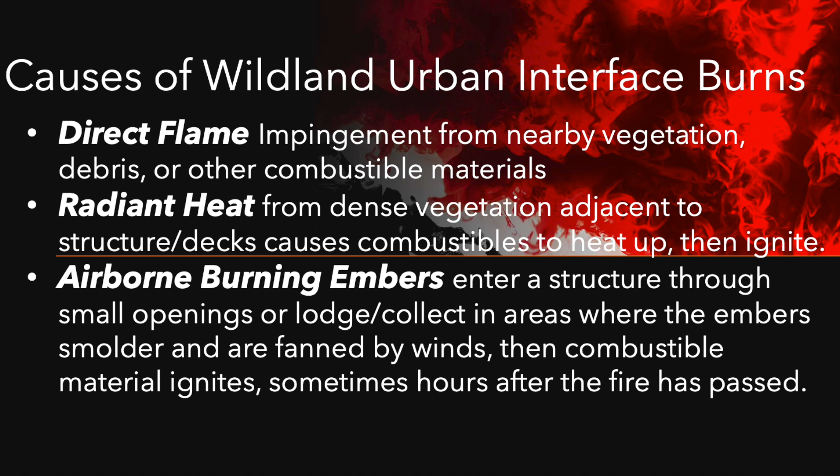Causes of wildland-urban interface burns: direct flame impingement, radiant heat, and airborne burning embers has caused some dynamics to wildland firefighting that we didn't experience before, where it's not just vegetation that's burning, but buildings, hazmat, sheds that keep hazmat. You see those types of structures burn for a long time. They can smolder for weeks. And you see embers flying from those to other areas of the county, and it's added a complexity to these fires.

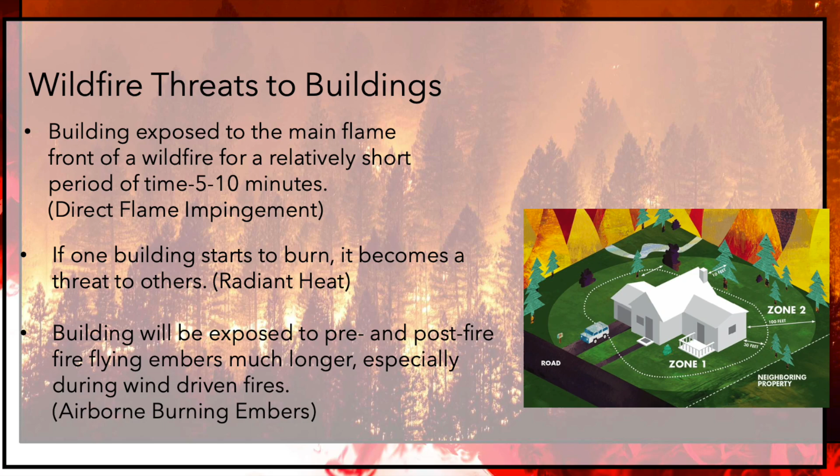So the goal of Wildland-Urban Interface code standards and vegetation management and clearance is to obviously harden homes and create a defensible space around these homes, kind of creating islands throughout your community where the fire can't pass through there and spread easily from vegetation to structures and vice versa, structures to vegetation.

A lot of fire resources are dedicated towards structure protection. When there is a house there, you can dedicate an engine company and a water tender just to a house, as opposed to a more traditional wildfire where you send resources and you dedicate them towards the flanks of the fire and controlling the flanks while you catch up to the head. When you have structures threatened, you usually dedicate resources towards that, and if they're dedicated towards structure protection, they're not able to chase the fire down and put it out.

Building code standards, Chapter 7A. This material is a little bit dry. I am going to go through it, but the construction materials that are allowed in the WUI are regulated by California Title 24, Chapter 7A, also known as the California Building Code. And then vegetation management, the other aspect of it, is California Public Resources Code 4291.

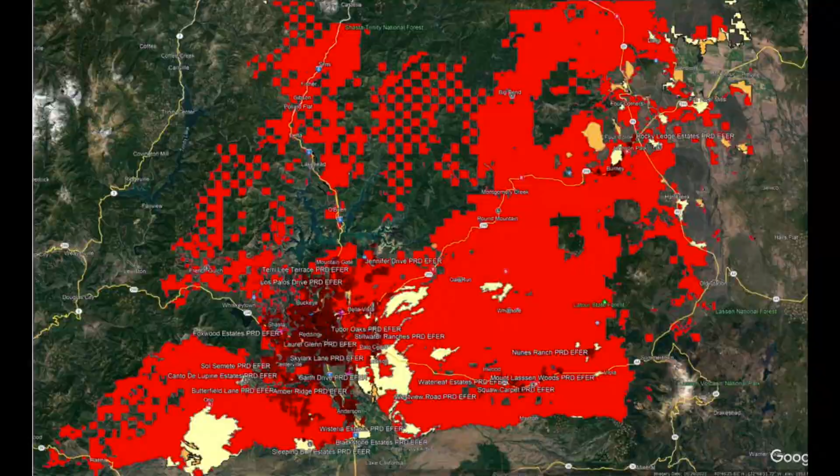So here's an overview of Shasta County. This solid red indicates very high fire severity zones throughout the county. The white is high fire severity zones, and then the non-colored is non-rated. Don't confuse all of these fire hydrants in Redding as part of the very high fire severity zone. That's just a whole bunch of fire hydrants jammed together in the city.

So we'll get into the different aspects of what types of building materials and how to recognize them as compliant materials for installing in the Wildland-Urban Interface. There's exterior sidings, and there's a section in the code that talks about exterior wall coverings and what to look for in a compliant material. Decking surfaces is a large one. I will be talking about that. I won't be talking about floor projections, and I'll be touching on windows briefly.

All right, so we'll just dive right into Chapter 7A, and I'll read from it. It can be a little bit tedious, I guess, but I feel that it's important to go through it. This chapter applies to building materials, systems, and/or assemblies used in the exterior design and construction of new buildings located within the Wildland-Urban Interface. The purpose of this chapter is to establish minimum standards for the protection of life and property by increasing the ability of a building located in any fire hazard zone within the state responsibility area or any Wildland-Urban Interface fire area to resist the intrusion of flame or burning embers projected by a vegetation fire and contributes to the systematic reduction in conflagration losses.

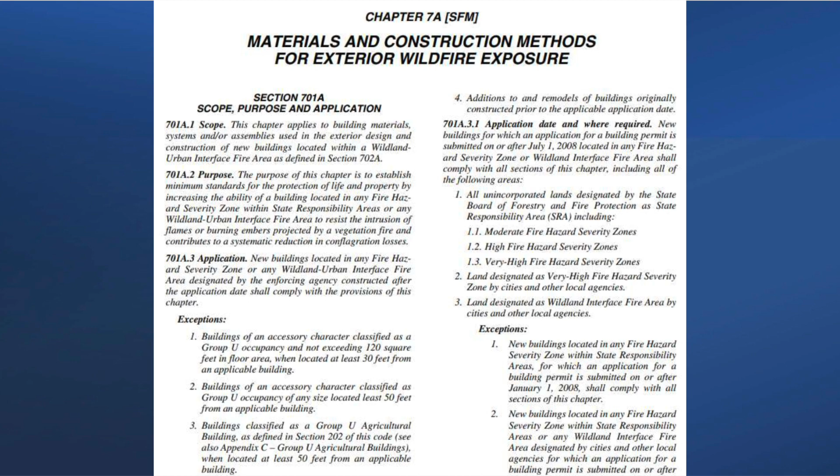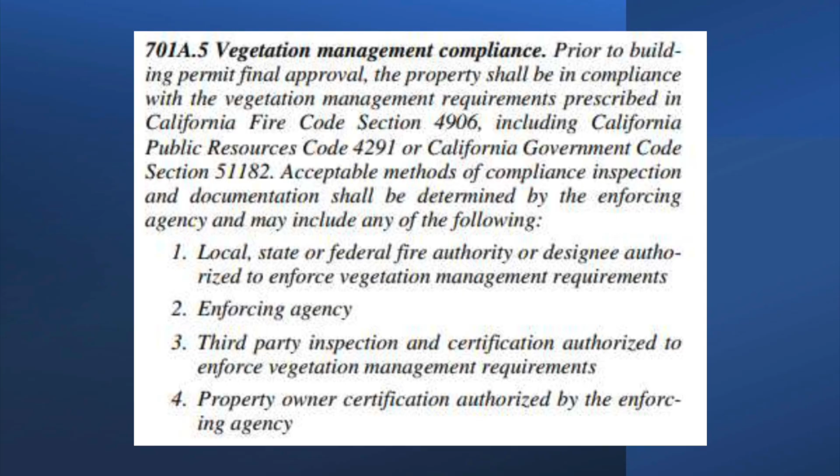There are some exceptions for smaller buildings, so sheds that are located remotely from other buildings and under a certain square footage. Vegetation management compliance. Prior to the building permit final approval, the property shall be in compliance with vegetation management requirements prescribed in California Fire Code 4906, including California PRC 4291.

So the way that the division of work has worked out in Shasta County anyway is that the building department enforces the materials for the building, ensuring that they're in compliance with WUI standards. Then my office inspects the vegetation management as a part of that construction inspection process. So the fire inspector will go out and look at the fire sprinklers and any other kind of fire protection systems that were built into the building. Then the building inspector looks at everything the building inspector looks at.

And then my office also looks at the vegetation clearances while the building is under construction and prior to certificate of occupancy. After the certificate of occupancy is issued, then the building department's jurisdiction basically ends. It becomes private property at that point and no longer subject to inspections, except the Public Resources Code 4291 allows for periodic inspections after the building and the property is finalized to ensure that the vegetation clearance is maintained over the life of that property. And that's what other departments do.

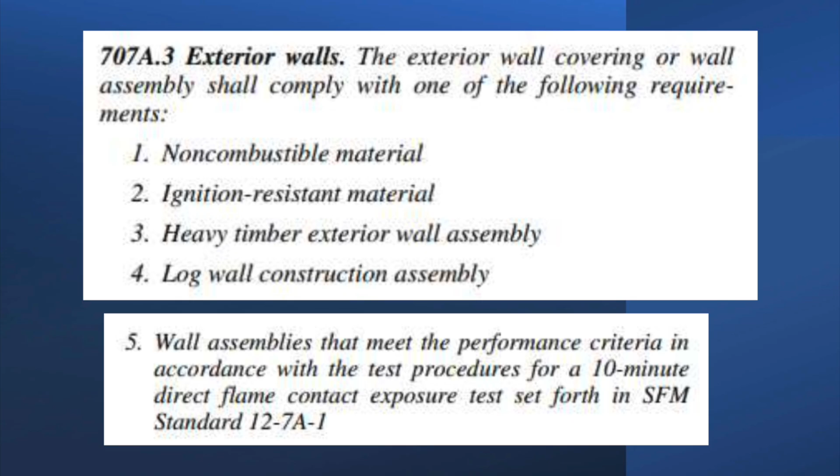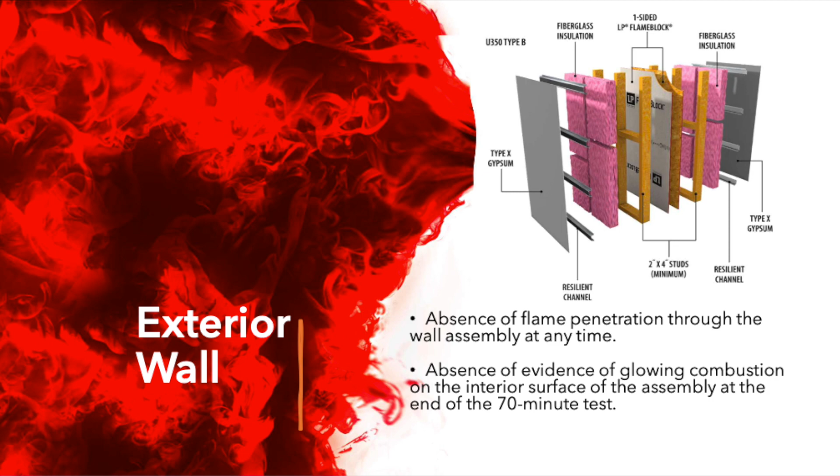Wall assemblies, actually it's my next slide. So multiple layers of, this is probably the most common. So your standard type 5A stick built house. You've got 2x4 exterior walls, insulation, moisture barrier, sheetrock, and then some kind of exterior siding. And depending on which assembly you choose, there's a whole bunch of different types of wall assemblies that you can choose from. It determines the fire rating of it.

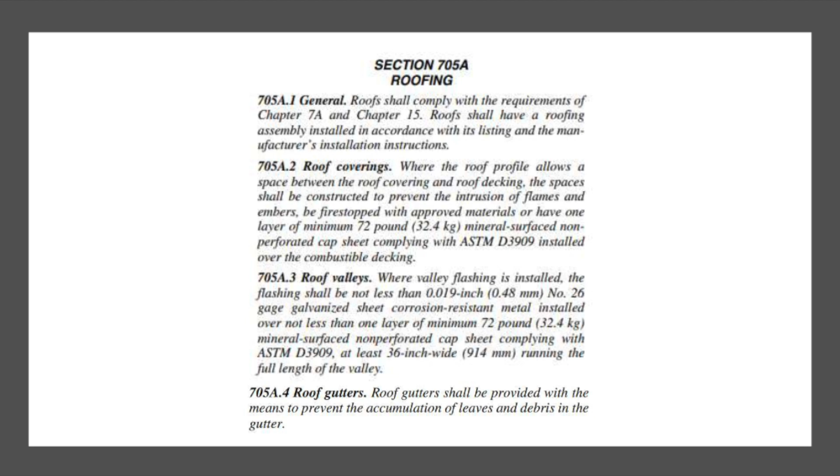Roofing. Roof shall comply with the requirements of Chapter 7A and Chapter 15. The assembly is installed in accordance with its listing and manufacturer's installation instructions. Bird stops shall be used at the eaves when the profile fits to prevent debris at the eave. Hip and ridge caps shall be mudded in to prevent intrusion of fire or embers.

So whenever you have gaps between your roof covering and the deck underneath, you have to block those off so that the accumulation of vegetation or bird's nests or anything else can't get in there, or embers can't fly in there and start your roof deck on fire. So it doesn't do a whole lot of good if you have a Class A roof, like non-combustible shingles or tiles, if burning embers or combustible vegetation can accumulate underneath it and set your roof deck on fire anyway.

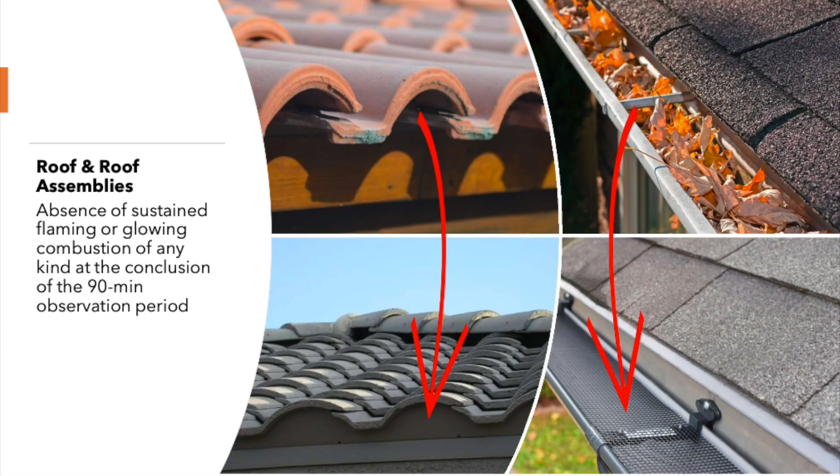And then the other part of that code section talks about having screened, or you don't have to use this product. The code is written in a vague way so that it doesn't encourage the use of specific products like these gutter guards, but written in a way just so that the accumulation of combustible materials doesn't just sit in your gutters.

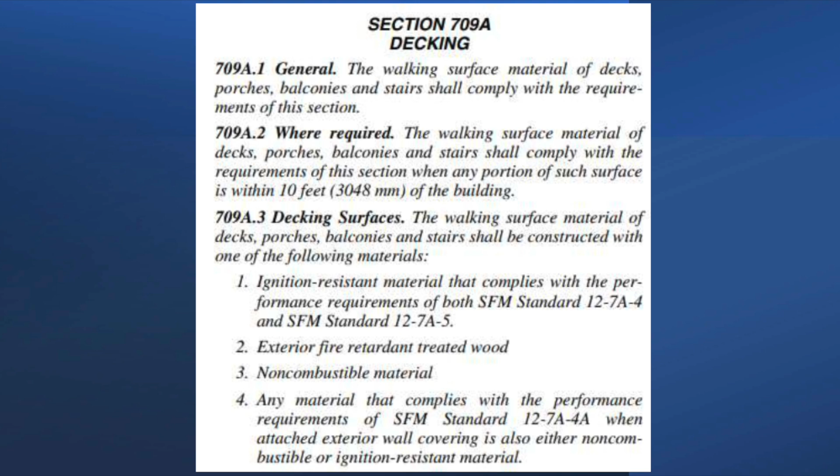All right, decking. The walking surface material of decks, porches, balconies, and stairs shall comply with the requirements of this section when any portion of such surface is within 10 feet of the building.

So, national listing agencies. Back, decades ago, there was one big player nationally that listed products, Underwriters Laboratories. I think everybody's heard of it. You could probably lift up any electronic device in here, and on the bottom of it, there'd be a UL stamp, meaning that it went through the national listing process and was tested for performance and safety as it relates to that particular product's purpose or what it's designed to do. So microwaves have to go through that process,

and so does lumber. So lumber stamps, we're probably all familiar with those, right? Pretty much all of us have been to a job site where you've seen plywood or any kind of structural wallboard sheathing that has stamps on it. Your wall studs are either identified as Doug Fir number 1, 2, or structural select, and those look like this.

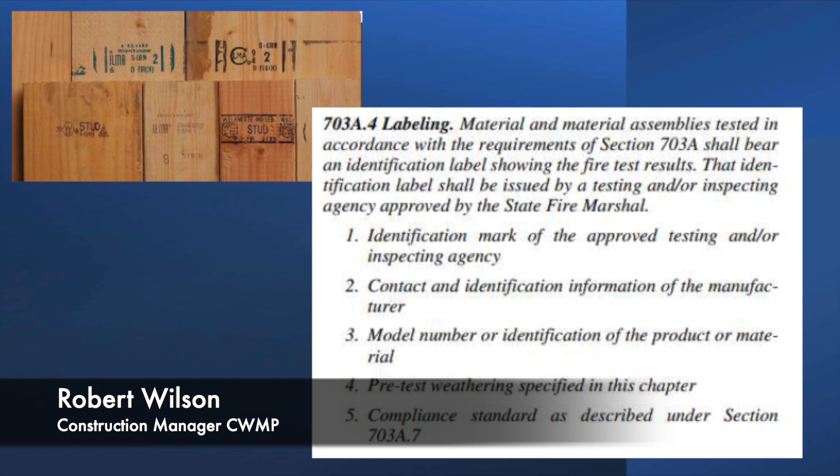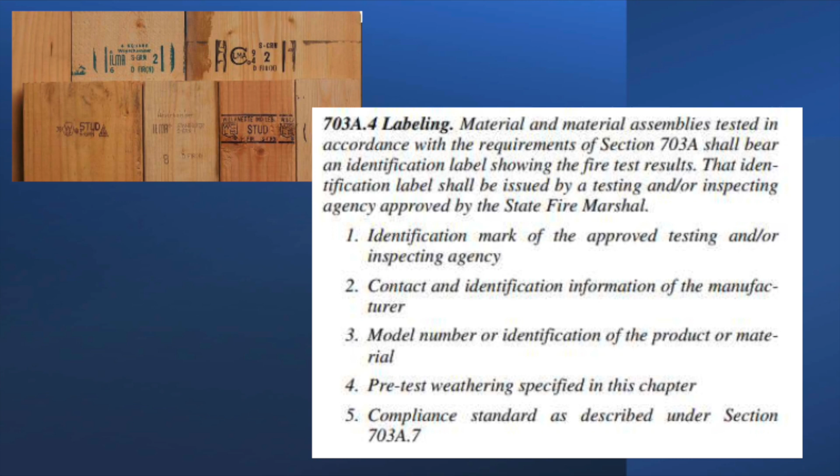It's up to the contractor to make sure that all these products are that way, which isn't that hard to do now. You still have your grade stamps on all your material, your studs and whatnot, which is really up to the builder whether he wants to use a quality framing material or one that's better. It depends on what you can afford. And for the property owner to also do their own research and make sure that the materials that they paid for are the ones that do get installed.

So the testing process, there's these national listing agencies. I think we've all heard of Underwriters Laboratories, UL, but all of these national listing agencies are certified to list products in North America, in the United States. Intertek, I'm familiar with them. IAPMO, yes. Factory Mutual. Here's one from Intertek that I just kind of grabbed at random.

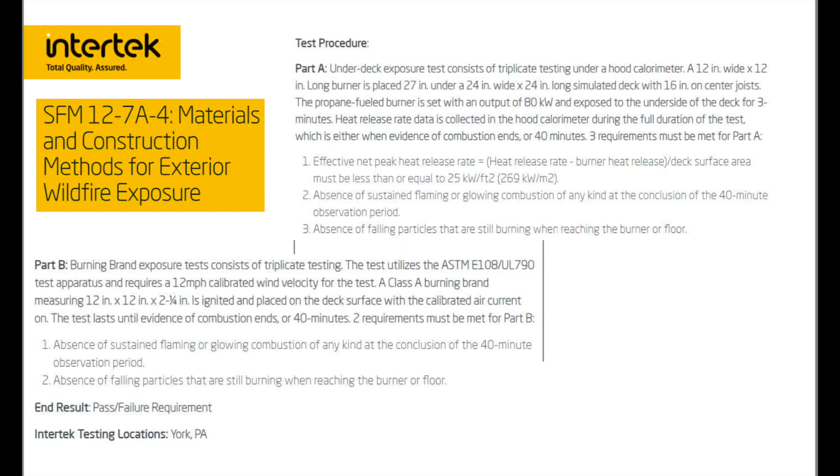And on their material data sheet, it identifies the specific fire test, I think this was for a composite decking material of some kind, if I remember correctly. This is right out of the code on what fire standards, like how many BTUs have to be subjected to the material for how much time and under what conditions.

And then there's third-party inspectors to make sure that all of the conditions are accurate and nobody's cheating. And the manufacturer of the product is the one who's paying for it all. Then, once you complete that process, then you go to whichever state you want to sell your product in, or the manufacturers of the product do. And in California, this is the process for that.

You would go to the state fire marshal, not to be confused with the county fire marshal, which is what I do, but the California State Fire Marshal. You'll go through their process. You'll identify which national listing agency you already went through. The state fire marshal will do their own testing and verify. And a lot of times they'll send their own third-party inspectors to verify that the national listing agency process was accurately performed.

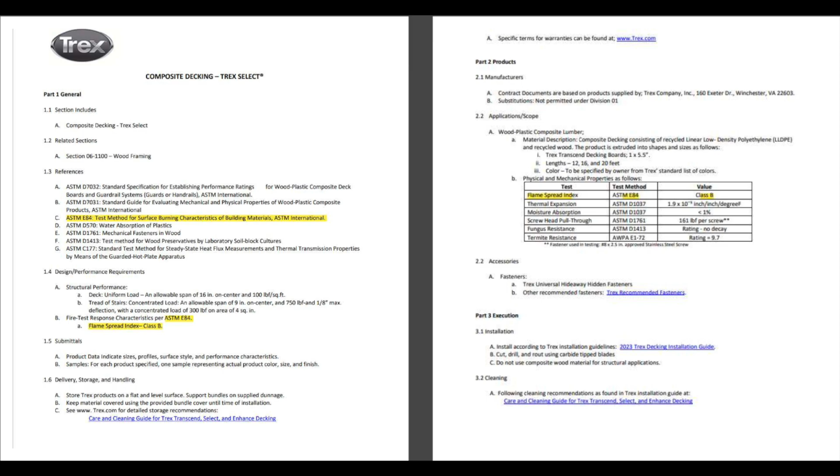And here's an example of a typical one; this particular one is Trex. The manufacturers of this product went through the national listing process, and I highlighted the parts. So ASTM E84, test method for surface burning characteristics of building materials. It has a flame spread index of class B, and again, that's also here.

Typically, what a good building plans examiner or fire plans examiner would do is, and this one was performed by the national listing agency Intertek, you would go to Intertek and find their list of materials that they have certified, and you would find this particular make and model of product hopefully on their list, so that you could verify that the manufacturer's spec sheet wasn't just created by somebody else.

For windows, I'm not going to dive into the code section and read directly from it, but there's multiple ways to get code-compliant windows. And your eaves. The eaves were specifically called out in Chapter 7A because heat and flame and gases are trapped under there, and it's a leading cause. If this isn't protected underneath your eave, then your house is not hardened at all. It's a good way, well, it's a bad way, whatever.

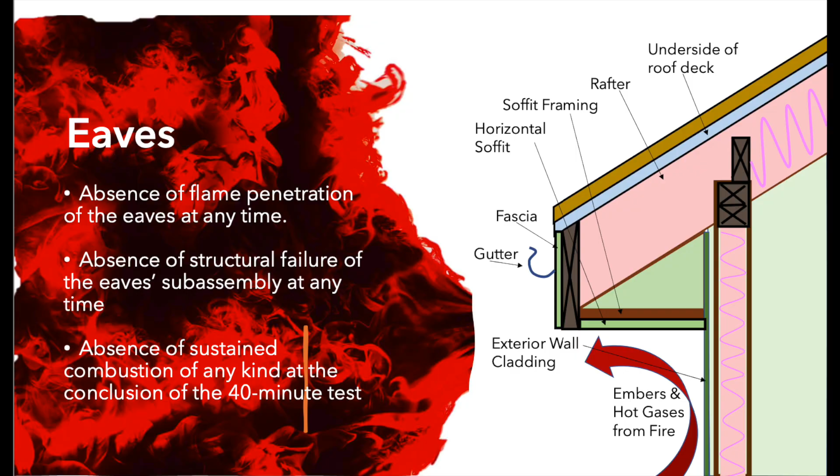So you put some kind of fire-rated product here, and you put some kind of rated eave vent to protect your attic, and those close down when subject to high heat and flame, and close that opening into your attic space, so your attic doesn't catch on fire. And also vice versa. If the fire starts inside the house, same concept. The room becomes fully involved, burns through your ceiling into your attic, and then is stopped from exiting out your eave vents and setting your neighbor's property on fire also.

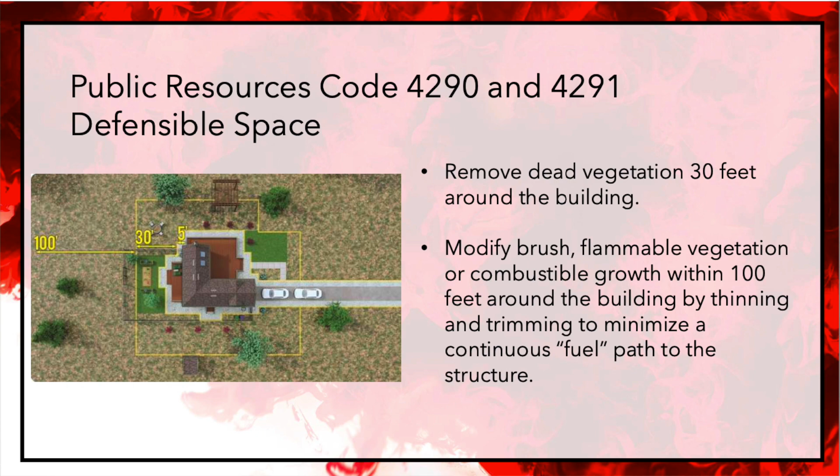Defensible space. I'll just touch on it briefly. Your vegetation right up next to your house has to be more sparse and more alive. And as you get further out, it can be a little bit more dense, and you're allowed a little bit more dead or dry vegetation. And as you get further out, it can be even more dense and more dead. Yeah, okay. And that all comes from Public Resources Code 4291. And now I'm done.